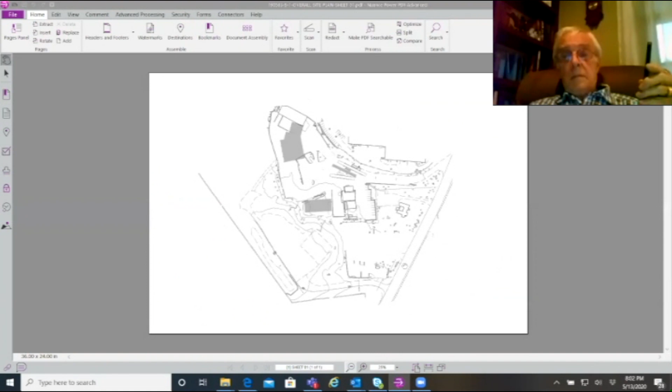So when we see their final application, the bulk table calculations will not be for the 36-some odd acres. It'll be for the acreage of the first two lots, and the requirements for their variances will be based on that.

And the building, which is the pavilion, is actually on that third lot. So it gets a little more complicated, but we've now discussed it and they know what they have to do.

According to Roland, though they will do these calculations now, they don't actually have to accomplish the merger until we get close to final approval, and they need to accomplish that before any final approvals are granted. So this is one of the good reasons they did this informal review initially, and we got this part kind of straightened out. We'll see how they deal with this when they come back with their revised site plan and their application for regular site plan approval.

Joe? Joe? Serena, I'm curious, Joe? Can you not hear me? Yes, we can hear you. Okay.

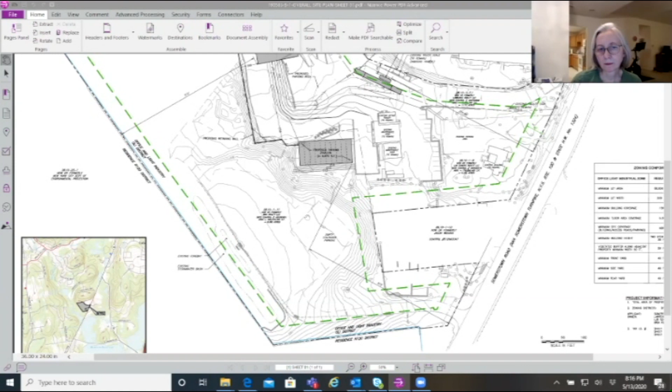Ask Vicky, Joe. Well, I just wanted to know - how long has that area been gravel?

To be perfectly honest with you, as long as I've been working with Somers Sanitation, which is about 15 years now. So they've been using it as container storage for quite some time.

Empty containers. Right, so I have two questions associated with that. Will that area continue to be used for empty containers in the future? I believe so, yes. So then shouldn't that be part of the site plan?

And that also leads - wait, but I believe that area already had a site plan to put those containers there.

That's what I was going to ask, Leslie, when you mentioned - as we start looking now at this as really two connected approvals, shouldn't Lot 11 start with what did you have approved before? And this is going to be a modification to that site plan. Then you're going to have modifications to two separate site plans.

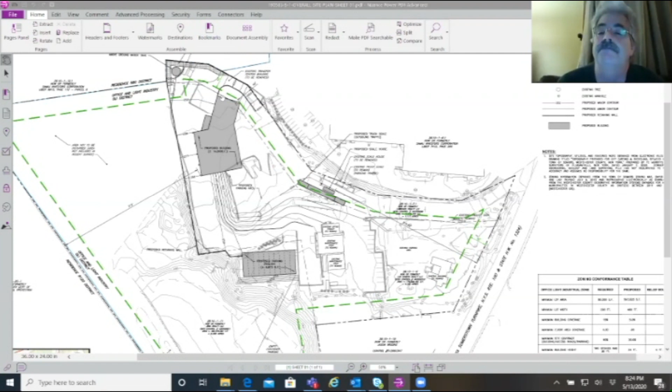All right, sorry Chris, to interrupt you. Just to remind myself, is this in a groundwater protection overlay district? It is, so we'll need to get that special permit for that as well. Right, so we need to make sure that we look carefully at how they're collecting everything and what the impacts are.

We'll show that on our formal site plan as well. I'm thinking that we're quite a ways away from a site walk. Probably wait to see what happens when you go for your variances. Does that make sense, Joe and board?

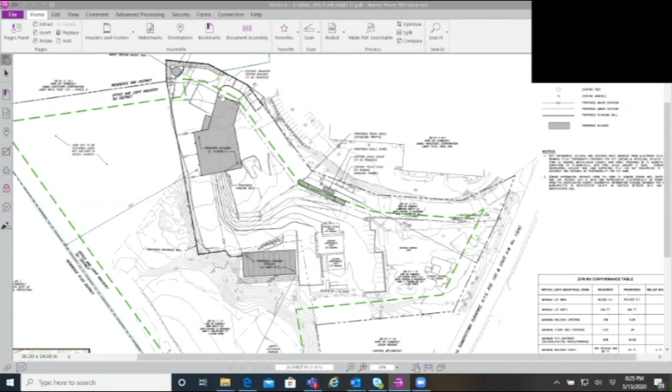Well, they will be coming back, if I'm correct, Leslie. The intent is for them to really make these into full site plans. I don't know if those will be ready for the June meeting, if you'll make the cutoff date. But whenever it is that they resubmit, you won't be ready, you said.

Not for June, we're gonna shoot for July. You're gonna be on your July meeting and submit it in June. Right, I'm sorry, say it again. We're aiming for your July meeting, which has a June 23rd submittal date. So we will see a full engineered plan based on all these comments tonight.

And I suspect Joe and I will be probably talking with them about a couple of things between now and then. But there's lots of things that they need to do that planning board members brought out, that Joe brought out, that I brought out. And earlier, this question of access in and the driveways - I think Vicky, you mentioned that. I said to them that they needed to really clearly identify where those driveways were and how all these things on the site are accessed from these driveways and the scales, et cetera.

Make it all very clear. It's almost impossible to see where those are now.

At that meeting in July, when the board would indicate its intent to be lead agency, they would clearly identify at that time what their need for variances are. Joe, you did have a good point about a separate site plan for lot 11, that building itself may require another variance depending on whether we define that pavilion as a structure. If it's a structure, it will need variances, but it clearly is closer to the property line than the setbacks would require. So all of this has to be looked at carefully, but then the planning board would presumably take a look, see what it thinks, and they would move on to the zoning board, and the planning board might want to give some type of memo to the zoning board related to it acting as lead agency and where it stands on these variances.

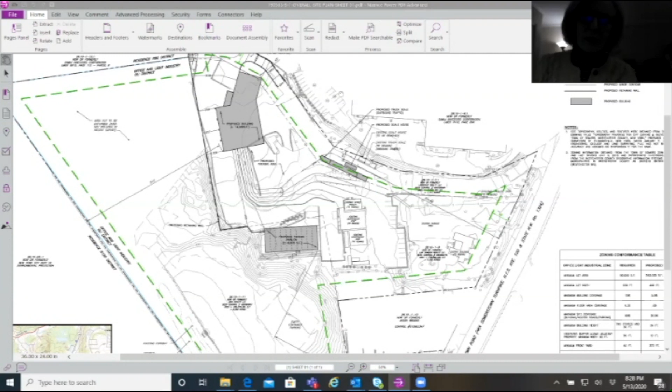Another thing you just brought up, Leslie, about all of these fans in the big building, one of the things we need to see in the EAF when you revise it is what the increase is from the building sizes, what the existing is versus the proposed on all of these, and what kinds of noise factors, what dBAs, and if there's any issue with any of these things, since it's near a residential zone, this will be an improvement, because right now it's outside, not enclosed, but the noise will actually be less, and we'll be able to present that. The fans wouldn't be running at night either.

You need to explain all of that, and we'll have specifications on what the decibel levels are for that.

Joe, John? Go ahead, Joe. Do you have a second question, Joe?

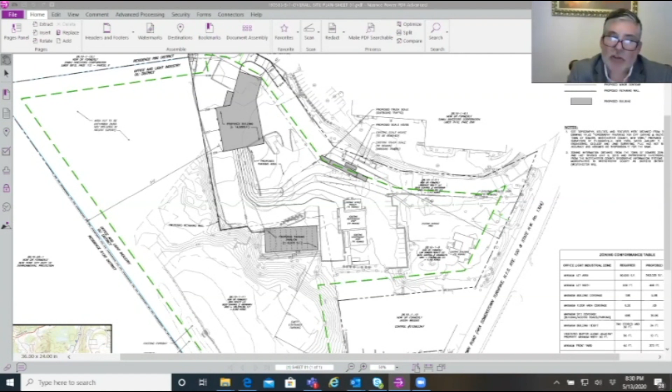Since you brought up lead agency, I did have a question. I'm curious how you're handling the DEC permitting. Are we coordinating in any way with the DEC? Are they going to also seek to be lead agency on their permit? Have you had any conversations in that regard about the DEC's role in this, or do you anticipate getting the DEC solid waste permit as a condition of final approval? I would like to know what the DEC's expectations are relative to us interacting with them, because they are an involved agency here, since they have to issue a permit for this activity as well. I'm just curious, interested in your thoughts on that.

This is a renewal because we have a permit, so we're going to be renewing the permit. I believe we've had some preliminary discussions with DEC, but they're looking for the town, just like they did in the past, I've worked on this before, the town to be the lead agency. So they'd be looking for the planning board to be the lead agency. For them, this is an enhancement, obviously these are all improvements that make the site better. So they're just waiting for the town's neg dec.

Okay, thank you, Leslie. Sure.

I have one request. Because these ultimate site plans are intricate and busy, can we get full-size paper copies versus digital? Of course, digital is tough, we definitely will. We actually submitted paper copies even for this, but we will certainly give you paper copies. It's a lot easier than looking at it on the screen, so I understand that concern.

Amen. Amen. Yeah, John?

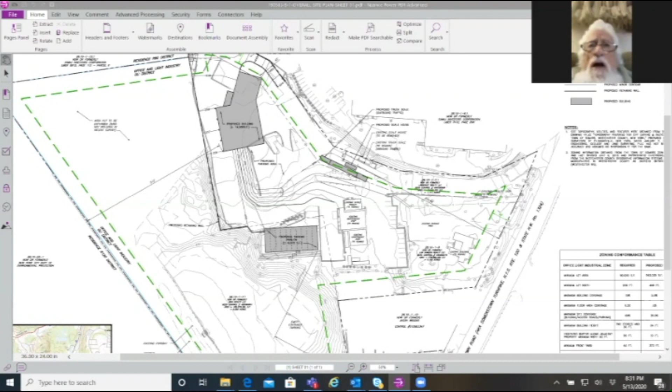Ask a question, John. Are we assuming no site walk? I just said I don't think we're near a site walk. No, I understand that. My question is though, that we would have to have a site walk in which we would then have some input in these variances that the zoning board is going to be asked to approve. I assume that's the procedure?

If they go to the ZBA, the procedure for them obtaining any variance would be the same as is typical, and yes, that would involve a referral to the planning board for its comments. You'd be looking at those issues as well.

Well, following that, maybe we should set up a site walk. I don't think we volunteer - we wait for their request.

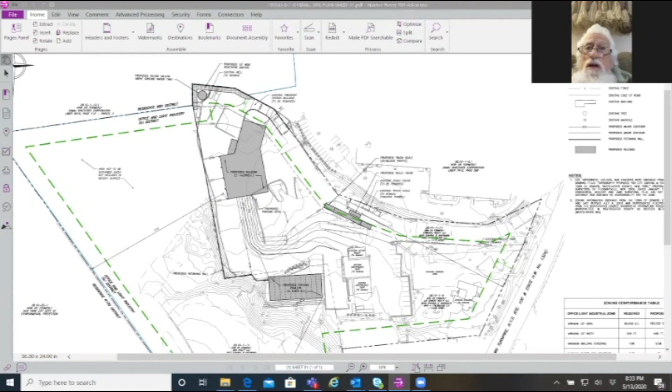Having recently been on the zoning board, the variances they're asking here seem to be extremely complicated, and I think they need the expertise of the planning board, having made their suggestions, so that the zoning board will have a lot more information than they normally have on approving variances, because this seems to be a unique problem here.

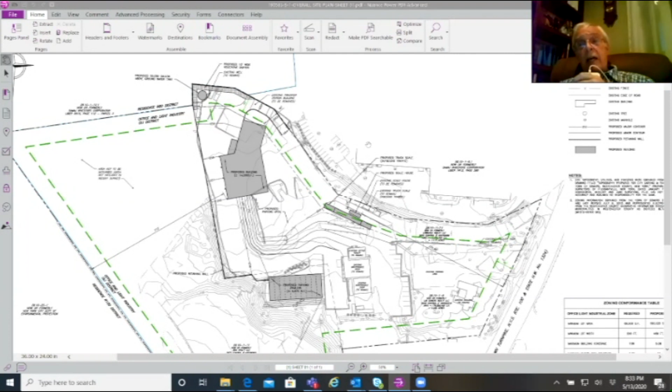I don't disagree, but they should provide information, not us volunteering. Because if we volunteer this time and don't next time, there's going to be hell to pay. They should just request it.

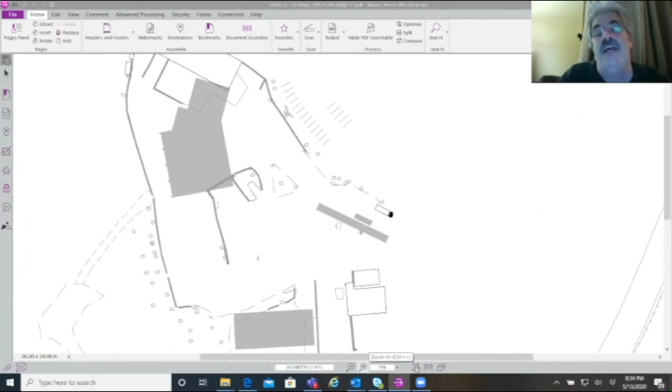If I could just point out a couple of items with regards to the variances we are going to be seeking. Right now we have a scale house building that is right on the property line. We're going to remove that and put a scale house here, which is 24 feet from the property line. And this vegetated buffer area is supposed to be 50 feet - the requirement is 50 feet from a residentially zoned area, which is inside this blue area up here.

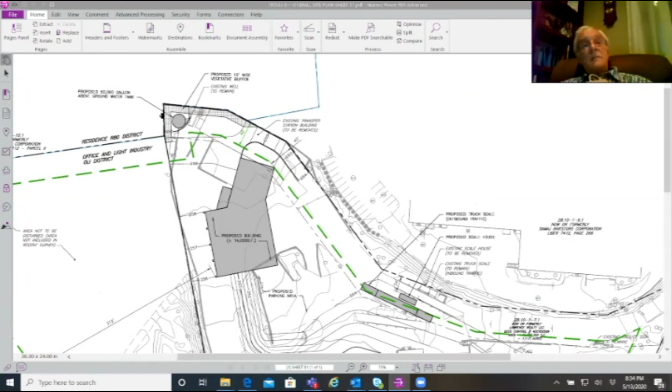Right now the transfer station building is literally on the property line, so we're going to move the structure away from the property line. We are able to provide a 10-foot buffer, but you'll see when you go out there - this is all woods. As you go to the north, there's a steep slope up to the nearest roadway, which is 900 feet up the hill.

So this is all heavily wooded, and this along here is all wooded. It's a relatively narrow strip, but it's all overgrown with trees and shrubs - a wooded area. So the variances are not that complicated. The three lots and some of the idiosyncrasies may be, but I think the variances are relatively simple, and are less issues than the existing buildings being that close to literally on the property line.

Which we got - just so the board's aware, we got variances for what's there now. We had gone to the zoning board many years ago, obviously.

I've used this facility and taken stuff to it several times. Never did I realize that the scale house was on the property line - it just appears to be totally on site. Exactly, not up against anything because it's so wooded.

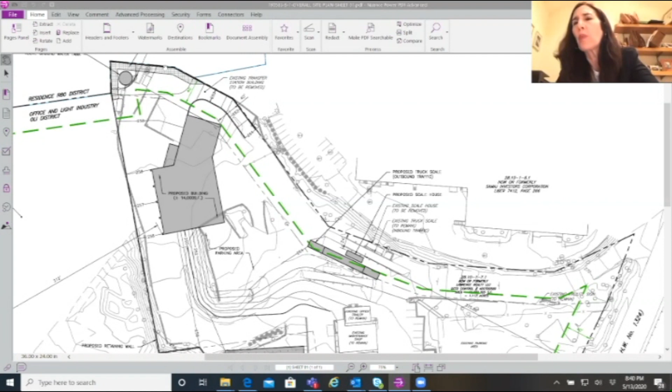Okay, well, we appreciate this because we're coming to the town to improve the existing operations. We want to work collaboratively, which coincidentally is what happened in '93, because prior to '93, when this building was put up, there was a concrete slab here, and the same materials were brought onto that slab, tipped, loaded into larger vehicles, and taken off site for disposal. In the early 90s, the DEC changed their regulations and required that waste be transferred under roofs, so the predecessor to the current applicant went to the town and got approval to put the structure up as an improvement by putting the material in a building. We're basically back doing the same thing for another upgrade to meet new regulations.

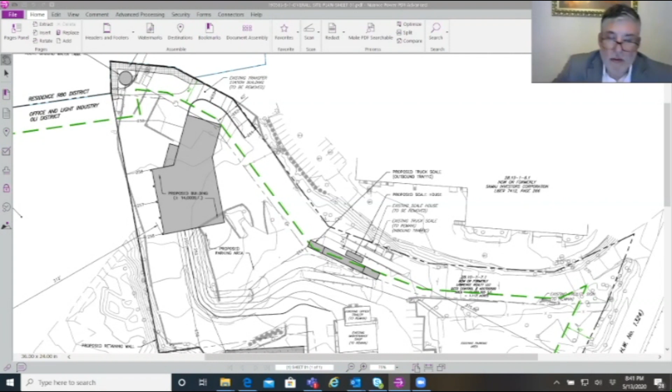Yeah, and I'm sure all that's true, but we have to make sure, since '93, there's been a lot of changes to our town code, some environmental laws. And that's why Joe is really harping on the stormwater stuff, especially at a refuse facility. So we just want to be thorough. I think what Joe is saying is we just want to make sure everything is in compliance, and that's really for your safety, as well as the safety of everyone within the town. You're right, it's collaborative, but we need to make sure it's conforming with all the regulations regarding everything, and it looks like you're going to have a lot.

You got a lot of variances here. You're trading some, right? You may not need a variance for being close to a property line, but you're going to need to file a new one now for a structure above 30 feet. So there's a lot to dig into here. I agree with some of the sentiments on the board that a site walk would be premature, and we can still talk about that later, because there's still a lot of administrative work and research that's got to get done to make sure this is heading in the right direction from the beginning.

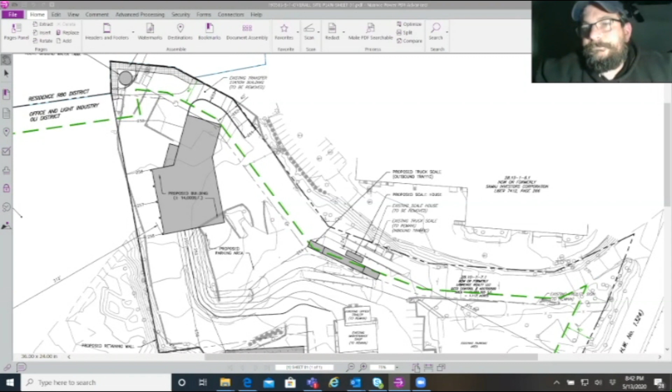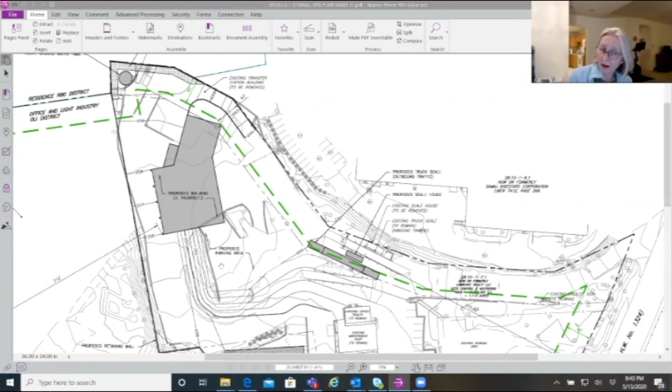Can I ask another question? Who's the engineer for these plans? Every time I magnify it, it goes all blurry. I can see PE and it looks like Prentice, but Francis Shaw, correct. All right, thank you. As Dennis said, sometimes it's great to see it on the screen, but when you try to increase resolution, you lose detail. Thank you.

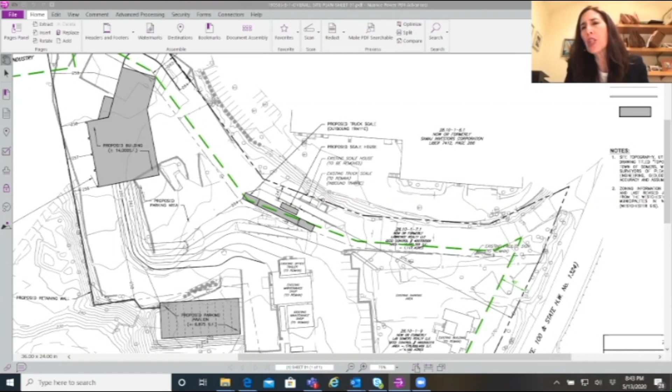Okay, last on our agenda is discussion of the draft local law. Surratt, you want to kind of lead us on this?

This came about as part of the review of the Cobbling Rock. What was determined, as I looked at the zoning, was that even though we had treated two prior subdivisions in a similar manner, the zoning itself did not address the way we wanted to treat these. So I discussed with Roland what I felt was missing in the ordinance, and he agreed with me, and we determined to make a very simple addition to Article 3, Roman numeral 3A, the conservation zoning.

That happens in section E, number 1. Currently, the way the conservation zoning reads, the only way you can create a conservation area is if a recognized conservation organization or the town is willing to accept those conservation areas. What we found in the past was, except for very large, significant conservation areas such as Stewart Farm, there aren't conservation organizations willing to take them, and the town is not interested in taking these.